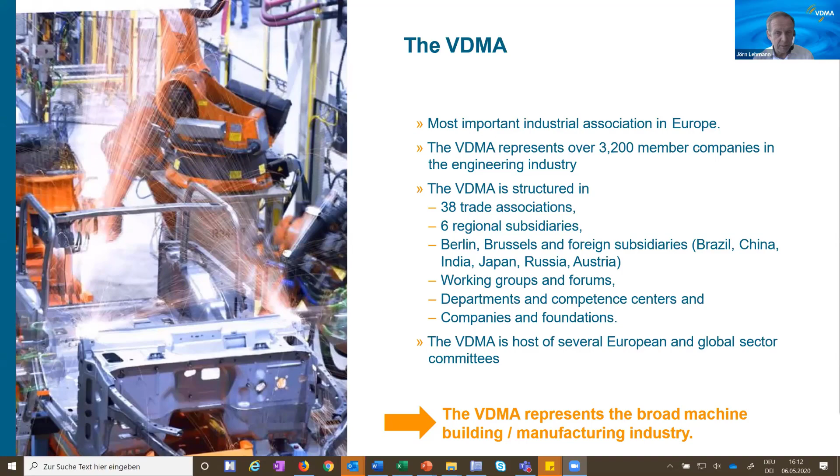Let me take a look at OPC UA, Open Platform Communication - what's behind this, and why do we believe in the VDMA, with our members, that it will be the future common language in mining. Let's see a short video about one minute about OPC UA.

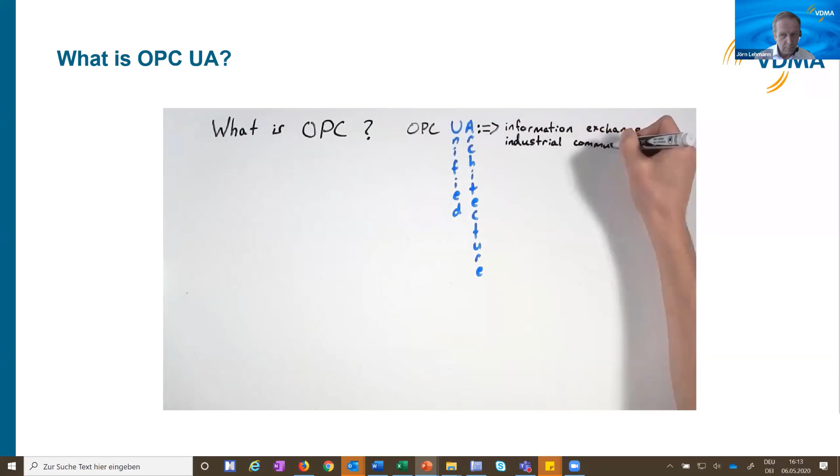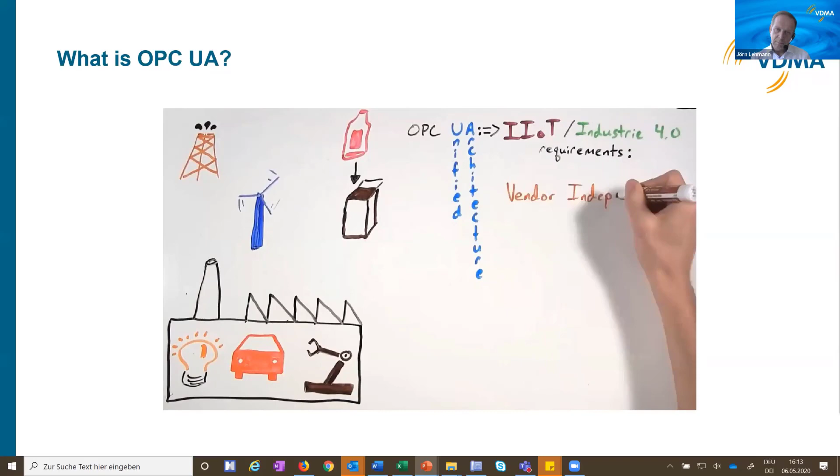What is OPC? OPC UA is an open standard that specifies information exchange for industrial communication, particularly on devices within machines, between machines, and from machines to systems, in a convergence of IT and OT. It can be used with any software platform - Windows, Linux, Mac, Android - you get the picture. This makes OPC UA scalable, from minimal embedded controllers to massive cloud infrastructures, even mobile devices. OPC UA is equally suited in a closed network or utilized via the internet. Don't worry though, security is baked into the protocol for access control, authentication, and encryption. Because of its flexibility, OPC UA has been widely adopted in industries like automotive, food and beverage, oil and gas, energy and utilities, packaging, building automation, and so on. So as manufacturing moves into the Industrial Internet of Things, Industry 4.0 realm, OPC UA is already poised to fulfill the requirements.

One important argument for us in the mining industry was that the oil and gas industry uses OPC UA as well. So within the VDMA, we took a look at OPC UA and other standards, but which arguments led us to this technology? Within the framework of Industry 4.0, or Industrial Internet of Things, smart mining, various approaches were tested and their suitability for future automation was evaluated. Automation, Industry 4.0, smart mining - all of them require standardized interfaces to ensure communication between the different participants, for example machines or superordinate systems. And we think the following reasons spoke for OPC UA.

The requirements of mechanical engineering, like communication on an open platform, security by design, or the support of different protocols, will be met by OPC UA. We have benefits for mechanical engineering as well: manufacturer-independent communication, reduction of interfaces and supported protocols. And we think plug and work, condition monitoring, and predictive maintenance will be supported by OPC UA as well.

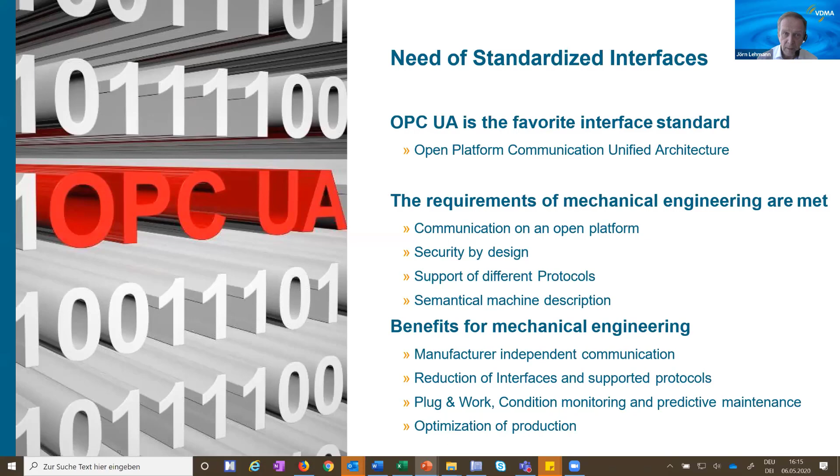So let's take a look at OPC UA. It's not a new development - it has a bit of history. The definition and the framework was developed from 2003 to 2009, and the final release of OPC UA was in 2009. Then, it seems important to me that from 2010 to 2012, OPC UA was standardized via IEC. So thus, it's now published worldwide and it's regularly reviewed, because every standard should be reviewed at least every 5 years.

As you know, we need agreements on common standards in order to be able to leverage the advantages of automation, Industry 4.0, IoT, or smart mining. And today, OPC UA offers us open source and toolkits. You can adopt OPC UA without any membership. Certification for members and non-members is possible, and they have a strong IPR policy.

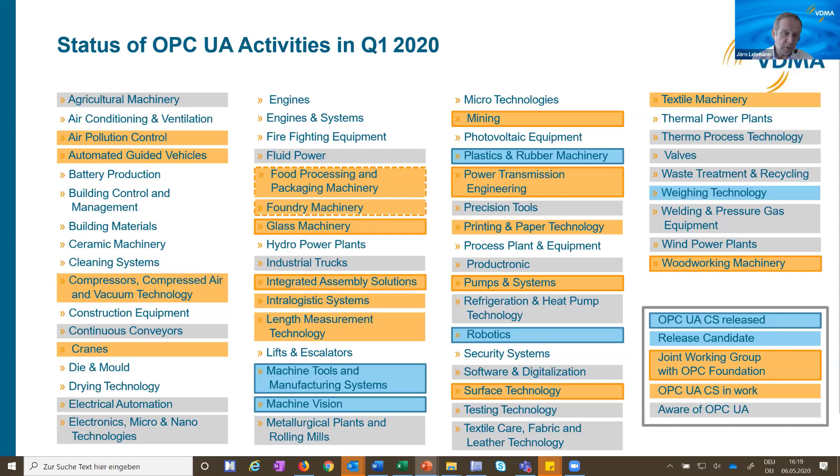So the colors indicate the different status of work of the different associations. We have already released some companion specifications for robotics, machine vision, and plastic and rubber machinery. There's a release candidate, for example, for weighing technology, and we currently have joint working groups with the OPC Foundation, like glass machinery, integrated assembly solutions, and our working group on mining. And more associations are discussing OPC UA.

And let me summarize our activities. We have a rapid increase of new OPC companion specification working groups. More than 18 sector branches are under discussion, and 17 sector branches are really active in implementation. And we have, in the end, 26 OPC UA companion specification working groups existing, with more than 450 companies which are involved and drive the development of this standard.

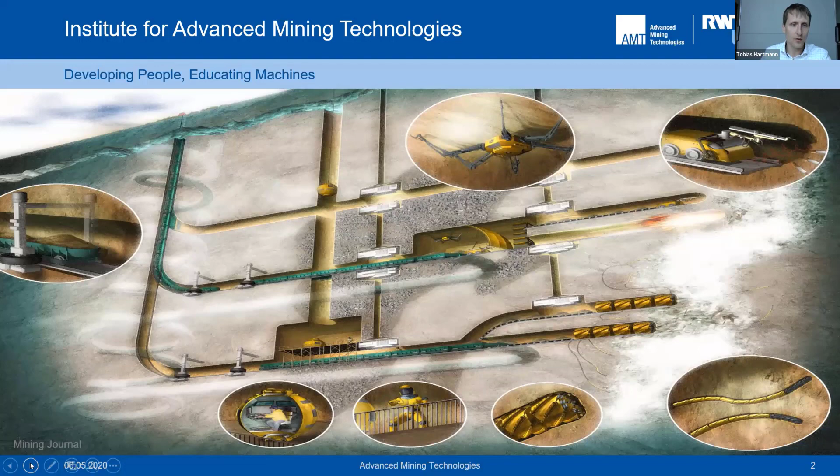First of all, let me introduce our institute real quick. At our Institute for Advanced Mining Technologies, we do research, education and transfer for a secure, efficient and responsible supply of raw materials through automation and digitalization of the mining industry, of mining machinery and processes, and do all this work, of course, within the mining industry in a lot of different projects.

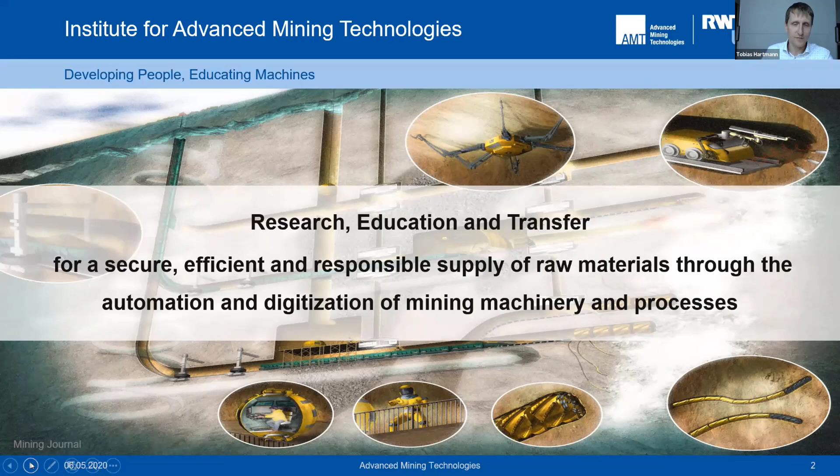Our research focus is along the data information value chain, where we always implement some kind of robust sensor technology, set up some kind of data transfer, digital communication, have some processing, whether it's image processing or machine learning, in very different applications. And then at the very end, together with our partners, we always create some kind of smart service from the information we gather within the processes or the automation of the machinery.

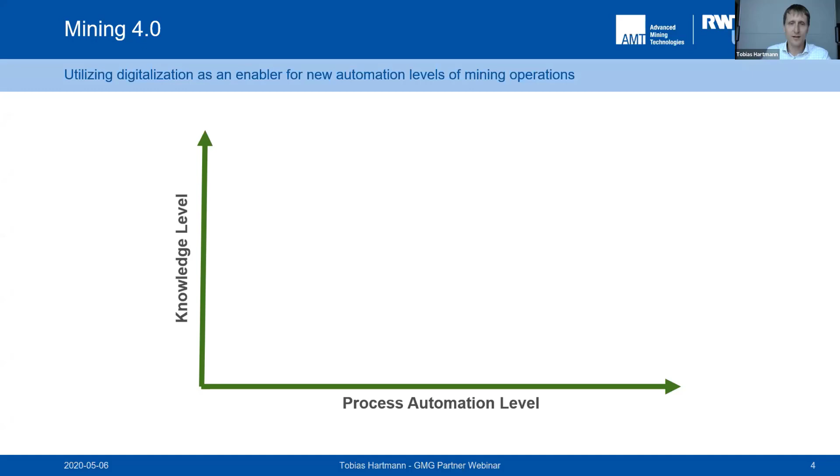So when we're talking about mining 4.0 and digitalization, we think that this digitalization is actually an enabler for raising, on the one hand, the automation level and the process automation of up to entire value chains, and on the other hand, it enables raising the knowledge level. As you know, in mining, there's always a lot of unknown, so a little bit more gathering and evaluation of data can bring large advantages.

But in the end, this automation of machinery and processes is highly connected to gathering information and gaining knowledge about the process, to be able to move to the next step of automation, and then be able to gain even more knowledge about your process or even about your entire value chain.

And here, machine to X will have the key role. I call it machine to X. It can be machine to machine, or to some supervising system, or to some human. The communication will rise along these automation levels and knowledge levels, and will have a key role in reaching the goal of autonomous, self-learning and also self-aware systems.

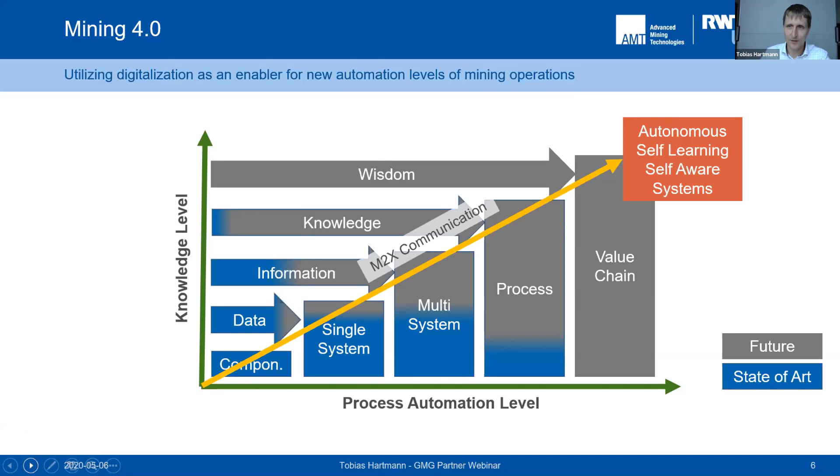And that is why we are very interested in supporting partners, OEMs and also the association in working together to establish a common language for machinery. And that is also the most important point. We often have different kinds of machinery, and we look at their internal data. They have internal communication, of course, for control commands or different purposes.

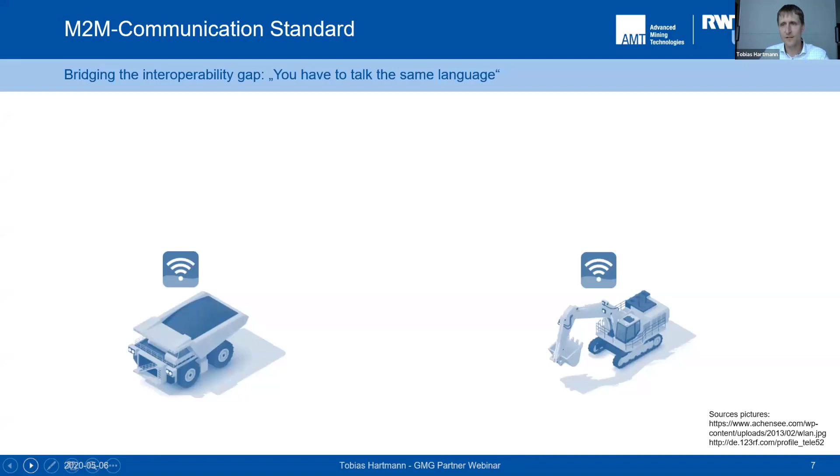And oftentimes we start connecting those machines and gathering the data, which is very inhomogeneous. What we see is that some of the companies gather that data, make it more homogeneous, evaluate that data and try to already get more value out of it. But there is still a large interoperability gap, not only in gathering the data and gaining information, but also in connecting those machines, since they basically speak a different language.

And if you sent the information of one machine to the other, it would not be possible to automate a process between those two straight away. So what we want to establish here is a common language for those two machines, that's the goal to reach. Make those machines structure their data in the same way so they can exchange data and information, also service-based, to raise the level of automation and be able to have them interact in some kind of process.

If we organize this communication in one specific way, it will enable us to just exchange the machine, no matter what color the machine is, or what the manufacturer prefers, or what internal communication the machine does, as long as it externally speaks the same language.

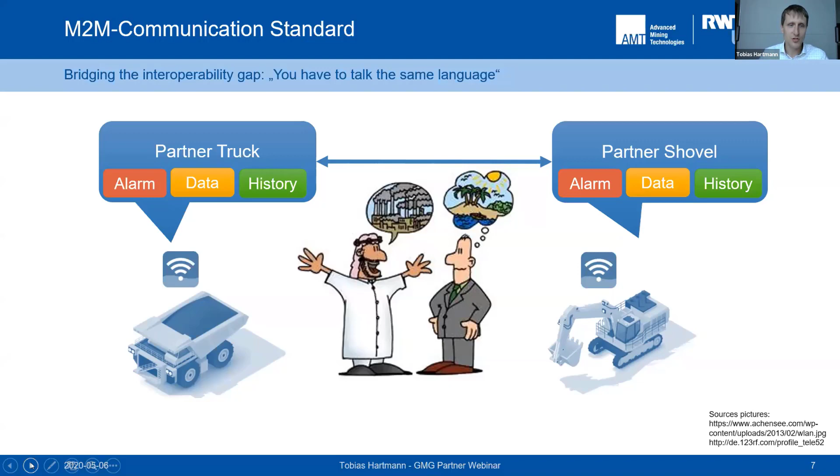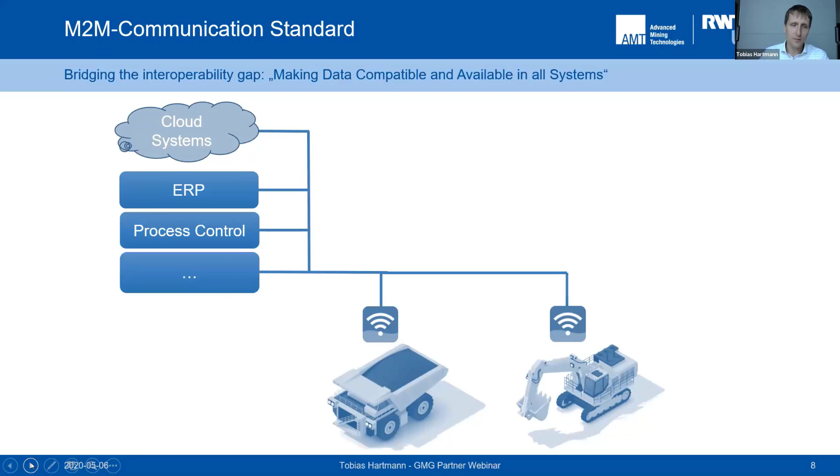If we have those two machines connected to each other, we can also bridge very easily the interoperability gap to other systems, and make that data compatible and available throughout our process systems, process control, ERP, or some new cloud services. That would really help us enable technology development.

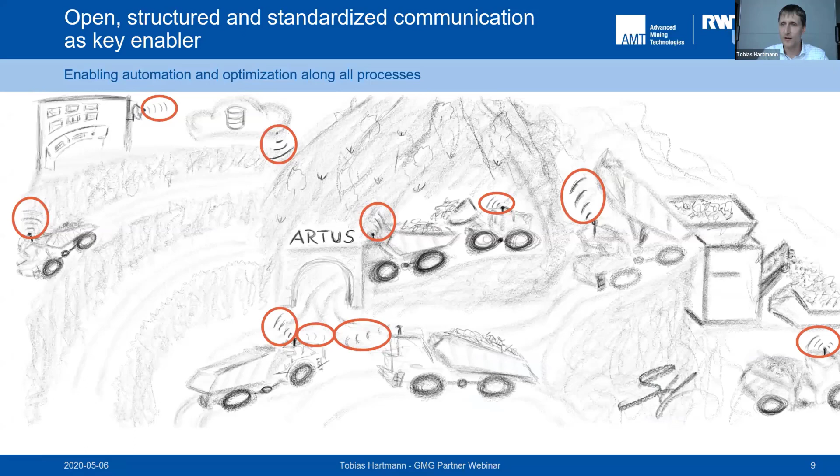That's why we think we need an open, structured, and standardized way of communication as a key enabling technology to further automate our processes, but also to optimize and gain information about our processes, and just become more efficient and more sustainable in our mining processes. So why isn't that already happening?

What is so challenging regarding communication in mining? As you know, we have a very complex and fast-changing environment where we have a huge variety of machines in very different mines with very different processes. The mines already often have existing infrastructure that they want to continue using, and there's already something prepared that we have to integrate into our system, whether it is mobile devices or stationary equipment. Overall, we just have a large variety of data, processes, existing systems, and setups.

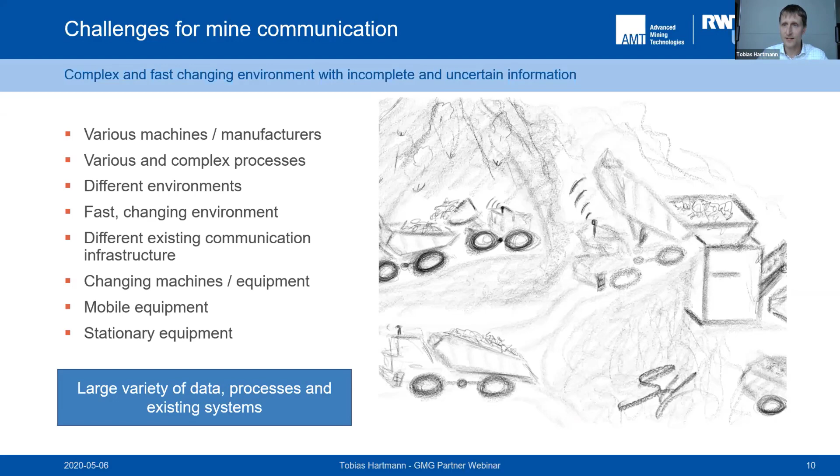So if we try to list some requirements we would like mine communication to have, first it needs to be independent of manufacturer and independent of platform, so everybody could integrate it. We need to be able to access those protocols and those interfaces.

We need a clear definition of what a position looks like, or what this information looks like, so that everybody understands what this data looks like, and that it's always structured in the same way if we have the same kind of machinery.

And of course, it has to be extensible beyond the specification. In the specification we won't be able to think of everything, so it needs to be extendable, and of course scalable for a variety of machines.

And we don't want it to be centralized. It needs to be possible to send information in a decentralized way, so we get good robustness of our system, so we don't have a single point of failure. And we can also decentralize our decision making.

So if a shovel is interacting with a truck, we don't need command control to make a decision here. The truck and the shovel can negotiate and make the decision themselves without that centralized communication. I think if we fulfill this list, whatever fulfills it has the ability to become a widely used and open standard.

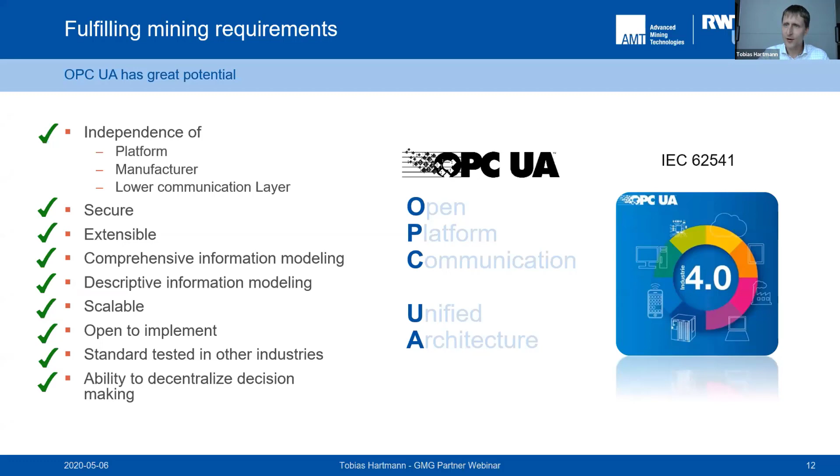OPC UA - I recently read an article where the person said OPC UA is like a Lego box where you can take pieces out and integrate your pieces into your communication system as you like.

If you look at the communication layers, the OSI model, OPC UA actually only designs the top layers, and you can use any lower layer communication system as you like. You can combine OPC UA with your Ethernet, IP, TCP, or you could even go for the future and change your network to 5G and use time-sensitive networking.

You can use all of this as a basis for OPC UA, or it would even be possible to combine the OPC UA session layer stack with some other application layers. For example, Modbus - you could say, okay, we create some parts of the language in OPC UA, but we want to keep those functions running, and then you only use the OPC UA security features.

So it has a lot of potential, not only to use it by itself, but also to combine this Lego box with other systems.

And when we speak of our mining companion specification, what we are actually working on, then we are always speaking of the application and the representation layer. So how do we represent the information of our machinery in a standardized way that other partners in the process or in the supervising system can process that data, and always take into account, when we create this specification together with the OEMs, that we have the application in mind and not just transfer everything in an unstructured way. So try to make best use out of the system.

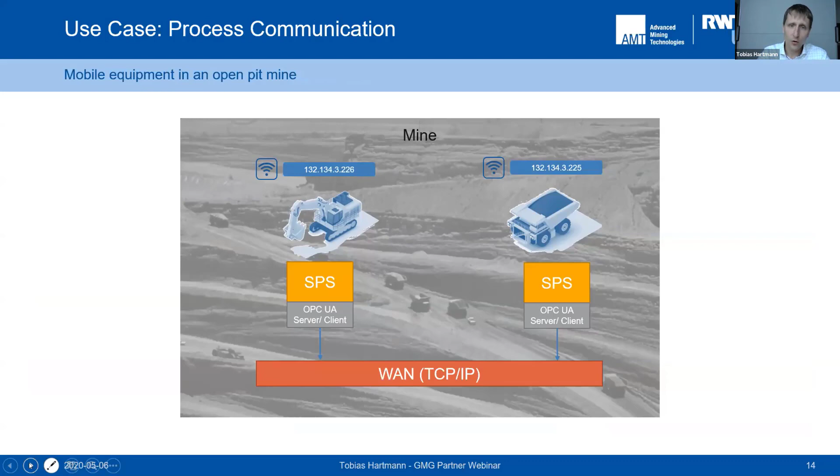Here I brought along some ideas how an implementation could look like. To come back to the example we just had, we of course can have a truck and shovel. They have their internal SPS communication, and then externally there can be an OPC UA server client system, and they can be communicating through your local WAN network. Or you could even use some public serviced network and send the information secured by OPC UA via the internet.

Or if you have already the online connection, you would not only be able to run the process automation, but also integrate remote service and supervising system onto your local network and have some faraway machines and services that run with the data and do some services or request data for analysis of your processes. So that is already all integrated into OPC UA, and that's why we think it is so strong.

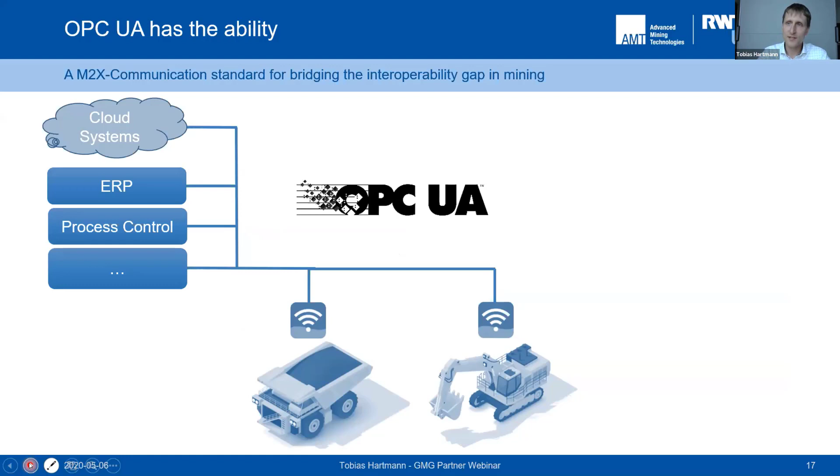So let me summarize this. We think that OPC UA has the ability to bridge this interoperability gap in mining. And of course, if something follows OPC UA, the structural work we put into it with the OEMs, with our partners, can be easily transferred to other object-oriented languages. But right now we see that OPC UA is very strong, and that's also why we actively participate in the work on the companion specification that is led by the VDMA.

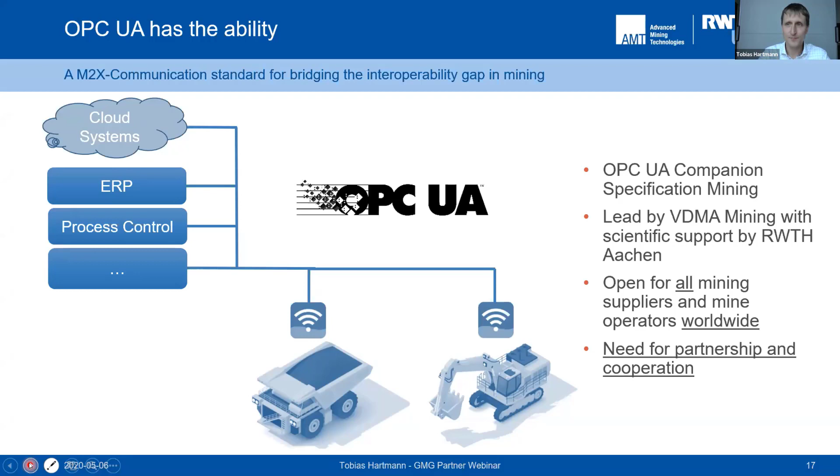And yes, we of course need all of you as partners, and we need a worldwide cooperation to make this the common language, and we would warmly invite you to participate. We also have a slide prepared later on when I've talked about our work in the workshops. And to come back to our data value information chain, we think that regarding the digital communication, OPC UA really can bring the mining and the digitalization forward. Thank you very much.

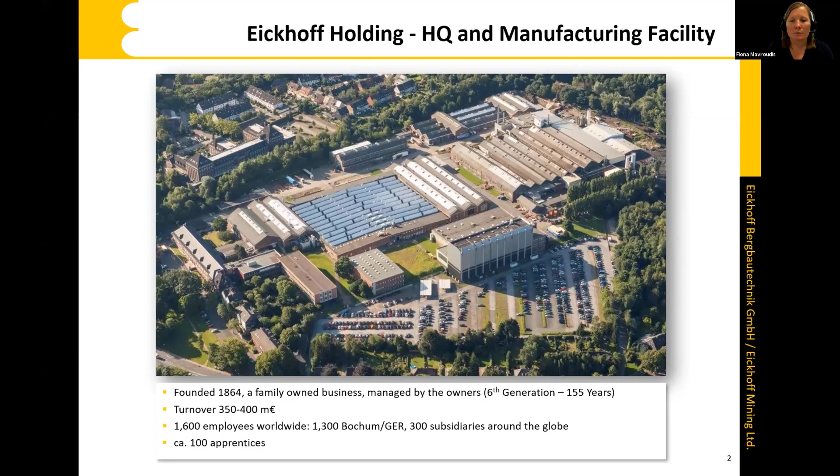Eickhoff emerged from the former iron foundry into a high-tech group of companies consisting, as you see on the slide, of industrial gearbox and wind turbine technology, casting technology, machine technology, and of course mining technology. Eickhoff mining technology is focused on the design of special machines exclusively for underground mining, with two types: the shearer loader for longwall mining, and the continuous miner for room and pillar.

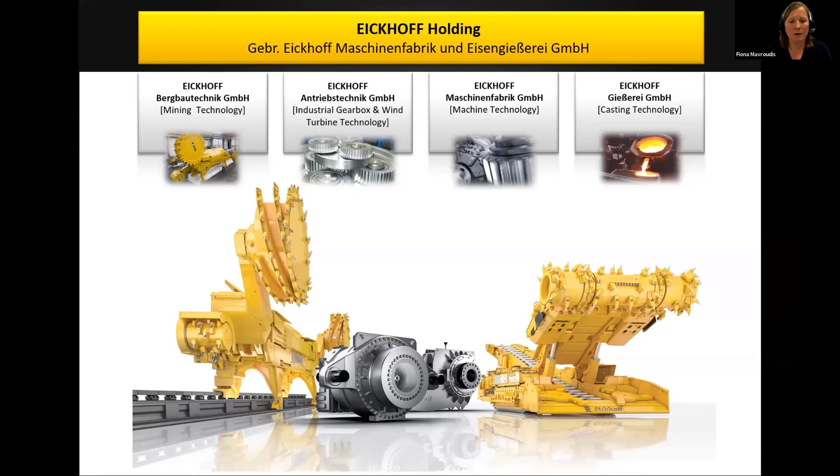Now I'd like to share some information regarding the shearer loader for better understanding of the overall context, and it makes it easier for me to transition to the OPC UA topic. Regarding the design of the shearer, it's basically a classic example of special machine engineering. From a modular system, depending on the geological requirements, we supply various series for different applications. Each machine is unique, tailor-made, adapted specially to the wishes of the customer. These underground machines have an operating range of 1.2 meters up to 8.5 meters, and a power input of 80 to 3,000 kilowatts, mining millions of tons of coal every month.

These machines are also equipped with a lot of sensors, including advanced sensors for geological and geometrical recognition. For example, we have radar sensors, inertial navigation, cameras, and also simple sensors for temperature, all in order to fulfill the high level of automation that we already have in some mines, and of course the remote control operation.

This shearer is also fully integrated into the mine infrastructure, so the shearer is not operating on its own; it is integrated in the underground mine and communicates with other longwall equipment. At this stage, we basically use different interfaces to external systems such as OPC, EtherNet/IP, and Modbus TCP.

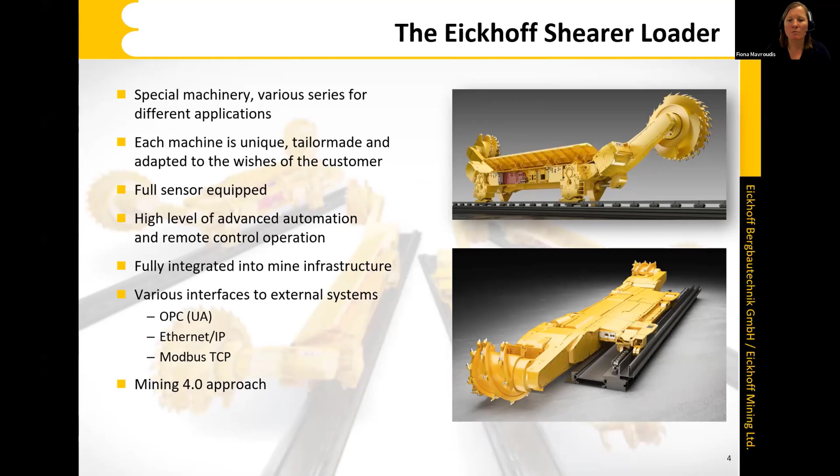We have a big focus on Mining 4.0, but here we are not looking to transfer the Industry 4.0 objectives to mining; we are rather thinking of an advancement of automation in the complete process of mining, including extraction, transport, and processing.

The information, for example, conveyor loading, shearer location, collision risk, and other process data is exchanged and then sent to the control station and also the control room on the surface of the mine. And after the shearer passes through, we have automated processes happening there. The shields are set automatically and the conveyor is moved.

So already the shearer is able to operate remotely and autonomously in this very extreme underground environment. But the basic requirements always are standardized communications that are independent of the manufacturer, and of course our robust data transmission systems. So in underground mining, or in longwall mining, we talk about a horizontal and a vertical machine-to-machine communication.

At this stage nowadays, the human factor underground is mandatory, but when looking to the future, we definitely need to rethink the equipment and the technology that we now use for automation, up to data analytics and processes, and how we use that. So in the near time, I believe we won't have underground machine operators, but we will have a longwall operator that configures the entire system based on a common language from the surface.

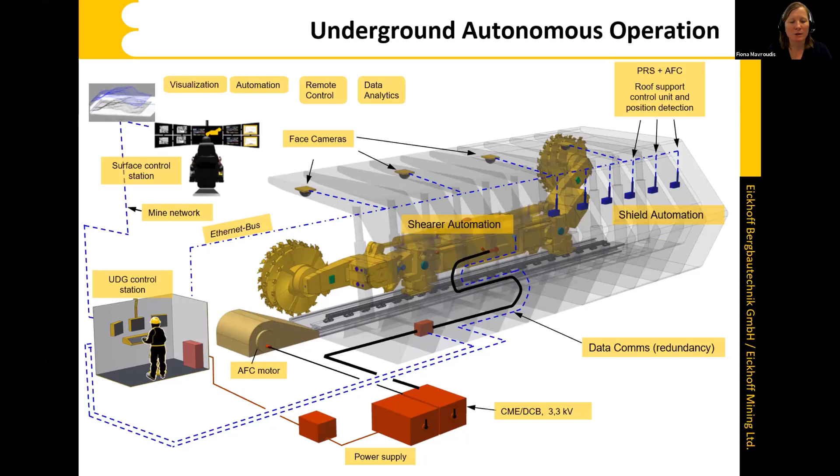And now we're coming a little bit closer to the OPC topic. I'd like to share this information with you just to have a better transition to that. In order to align with our roadmap and be prepared for these future applications, we redesigned the Eickhoff software framework as a modular object-oriented machine software that basically reflects the real structure of the machine. This software framework is nowadays based on the Codesys development environment.

The single modules map the hardware and the functionalities, and of course the metadata, interfaces, field bus devices, and input-output assignments can be made. The machine can be configured and assembled from the desired modules with all the relevant parameters. And due to our decision that the generated code includes all the available aspects in the modules, this generated code requires basically no more changes. And our development is, of course, now based on agile software development with Scrum and Kanban methods.

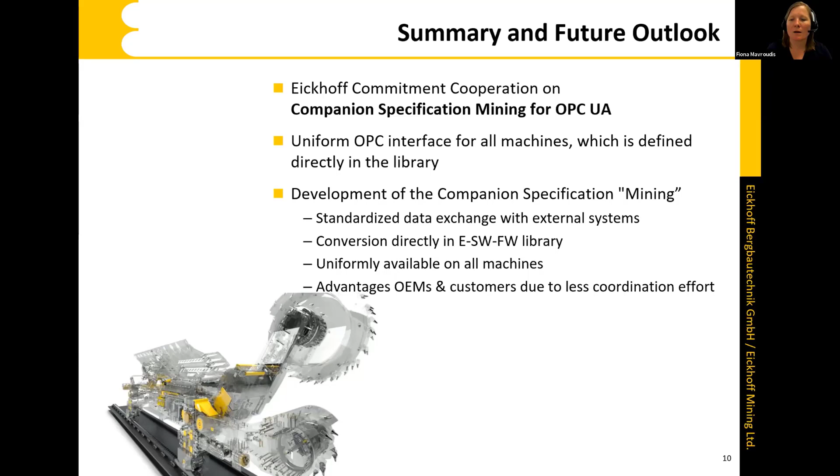So I'd like to close my short presentation here, and I hope I have managed to give you a brief overview and a better understanding. And I believe Tobias will also present the work of the groups and our efforts that have been done so far in the mining working group. So I thank you very much for your attention.

If I may add to that, we actually started looking into this topic more closely. Like, what do the process, the automation and the resource planning of the entire mine need, and what do we need to communicate to whom at what point in time? And we're actually looking at that right now in an ongoing development project. So yes, that's a very interesting question, and something we will look at in the future, how to integrate and who needs to know what to have optimized resource planning. Oh, I'm sorry, ERP, I didn't hear it right.

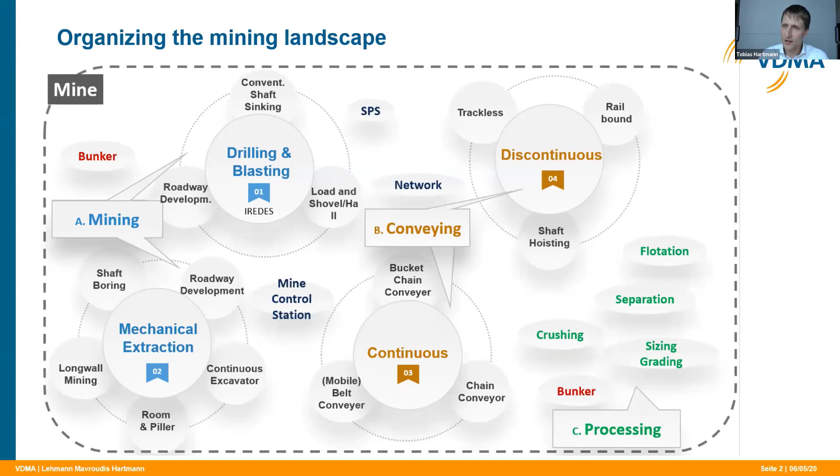When we had that set and got a little head start, we had the official start of the Companion Specification in October 2019. So we are not too far in yet. What we do right now with the OEMs is the identification of the use cases in the mining landscape. Where are they in this landscape? What is the actual application they would like to automate next, and what data and types of machinery do they want to make available through the system?

And then from that, we actually specify the objects of the machinery or of parts of the machinery. Then we have to define tests and test cases, how we can test our interfaces with actual hardware or in simulation, before we can have a release candidate of the Companion Specification in spring 21. That's our goal.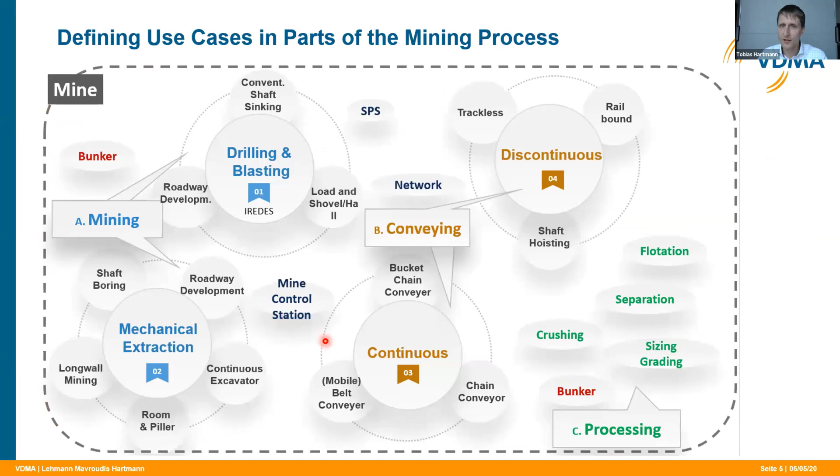So as I said, we organized mining in the mining landscape, and then we picked use cases from the mining industry, from the participating partner OEMs. They then started working on the use cases within the mining landscape as they wanted to, and already held a few workshops to identify the use cases.

So what is a use case? When we think of a mining process, a use case specifies some piece of that process that you would like to automate. For example, I take the truck and shovel again: the shovel filling the truck, or the truck going ahead to the crusher and emptying at the crusher. Those machines need some kind of interaction, and this is what we call a use case.

And then we analyzed the process of the use case. We know that those machines have a huge list of available data, but through the analysis of the process, we could identify not only the partners that go into interaction, but also find out what information who needs to have that process running automatically.

For example, when humans operate machines, you often hear them honking, and that's a form of communication. When there's no operator anymore, you replace that with a status change, saying 'I'm full' or 'you are full.' That way we analyze the process, identify what information the partner needs and what we need to share, and based on that we started modeling the machine objects, avoiding defining a lot of so-far unnecessary parameters.

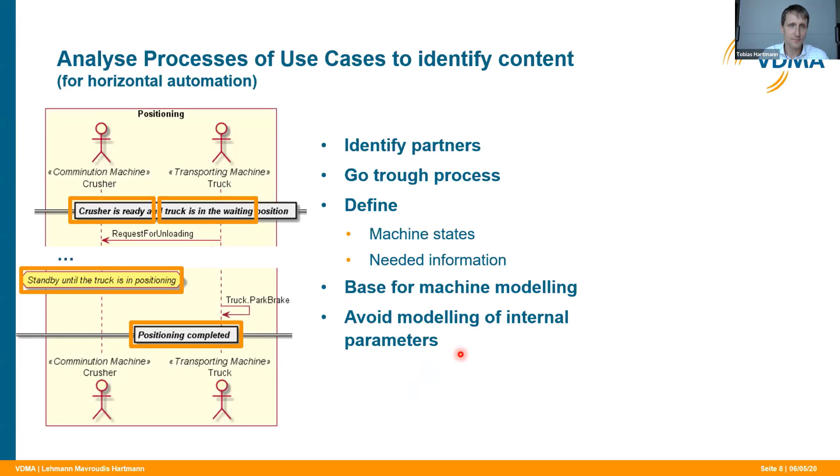Through the analysis of the process, we already gained a lot of fruitful discussions about the automation of the process and the data structure of the machinery. The manufacturers in the group started rethinking the things they were used to doing. Based on those use cases, we summarize all the statuses and information from the processes and use cases that we need. From that, we create and structure the so-called types that are the objects for the OPC UA.

That object could also be used in some different object-oriented communication. What we're also going to add is some use cases for the supervision of the machine - what does a command control system need to know about the machine, and what information does it provide into the vertical direction, the vertical integration.

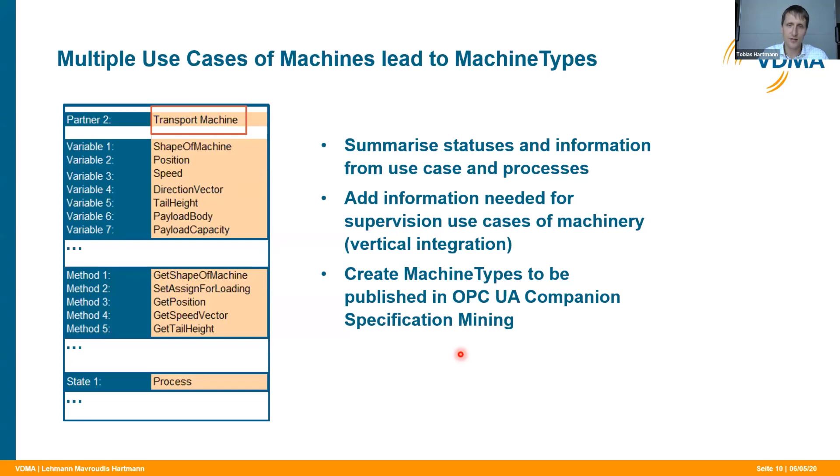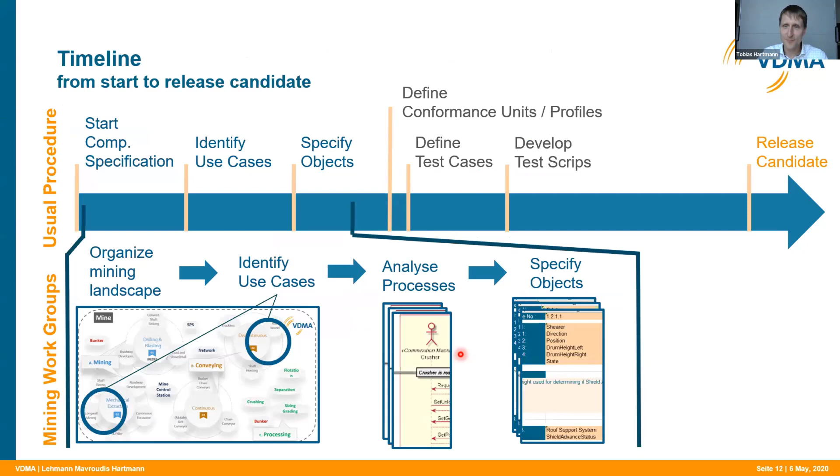After we specified the object, I created a timeline to show where we are - this is the current state. This already helped us get the context of our work and a certain understanding. It was very interesting to see the OEMs sitting together, experts for shearers, shields and conveyors, discussing what information they actually need to exchange to keep that process going.

They could summarize the whole shearer application use case down to only about 6 or 7 sets of data that they need to exchange once in a while, and they need to supervise each other a little bit, but otherwise it's all in the reliable responsibility of the machine that the manufacturer provides.

So the use cases help us describe the machines and their functionality, giving us an overview and the larger context. When we then define the objects and structures of the objects, we realize how we have to organize those objects into subtypes and supertypes. Then we can go ahead and harmonize those objects with different companion specifications.

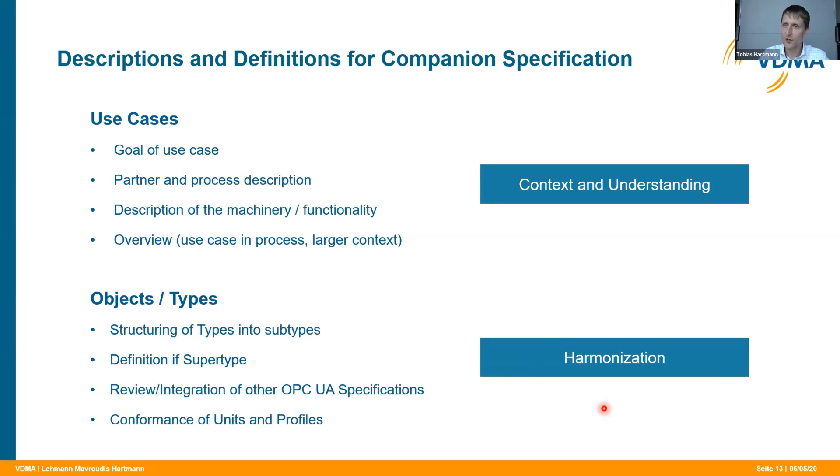For example, there was a lot in robotics that we could learn from for the mobile machines, and we're taking and harmonizing a lot from there, as well as other amendments that already exist.

So what's up next? We need to validate our use cases, finish defining our profiles, and come up with test scenarios to test our communication in simulation or with actual hardware. I guess that's the OEM's task to figure out how to test best.

And then we will go ahead and start picking up the next use cases. At this point, I have to invite you to participate and help fulfill the gaps of the use cases, and cooperate with us to create use cases within that mining landscape.

When our groups finish their first use cases, we keep iterating until time runs out and we have to hand in the first version of the specification. That will, of course, leave a lot of room for other use cases and more applications, since mining is such a huge and varied industry.